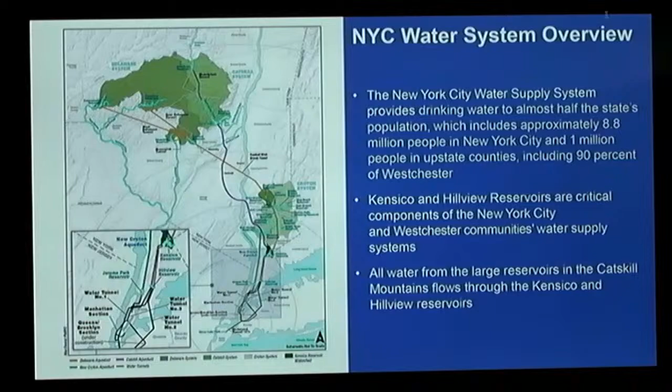So anyway, with me for team introductions, Matthew Warren, who's sitting, not at the front table, but Matt Warren's our Deputy Director for Water Treatment Operations, which essentially puts him in charge of Kensico. Also, I know he's got his hands in the alum treatment plant a little further north, the UV treatment at Eastview.

I know Carl since he's been here, but obviously before Carl too, and I've been helping support DEP's efforts and be a partner with the town for the past 17 years that I've worked for the DEP in different capacities. So some of you may know me, have seen me, or at other planning board meetings. So I don't have a card here because usually I'm just on my cell phone, but I can give it to you. Just come up to me afterwards. I'll give you my contact information.

So when we talk here, just the difference is, so I run the treatment operations, so for the treatment of the city's supply, and the team that's with me and Kevin's team is the one that's going to be helping oversee the project, but obviously I'm responsible for what goes on up there, and Sal will be the first to tell me that, so I will make sure that we do the right thing there all the time, because we've got a lot going on.

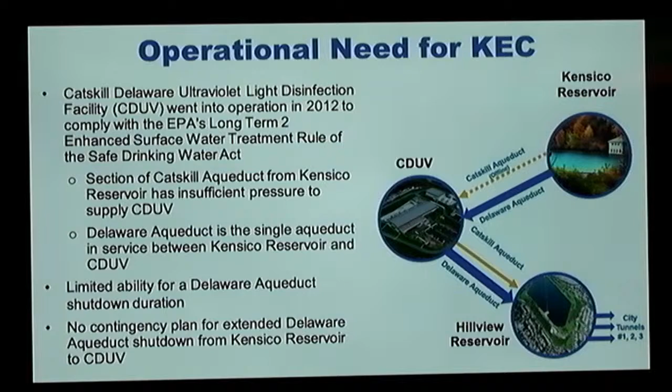So bottom line, we don't have any more than the one tunnel now going from Kensico to the UV treatment plant, and that's always between 90 and 100% of the city's supply in that transportation corridor.

Simultaneous to this project, this is a long-term capital project. It will be about 10 years long from the very start, which has already happened with some tree clearing that started a little bit earlier this year, to the very end, the commissioning of this tunnel, which is scheduled for, I think, 2034.

At the same time, we'll be doing a similar extended project at Hillview. We have new chemical addition facilities we're going to be building down there. All of this work has to be done in preparation for us putting a cover over Hillview Reservoir. We have to cover Hillview.

I think we're still in the design phase, trying to determine what kind of cover it will be. But to operate Hillview while we are building a cover, we will have to empty one of the two basins. It's a little bit trickier operation.

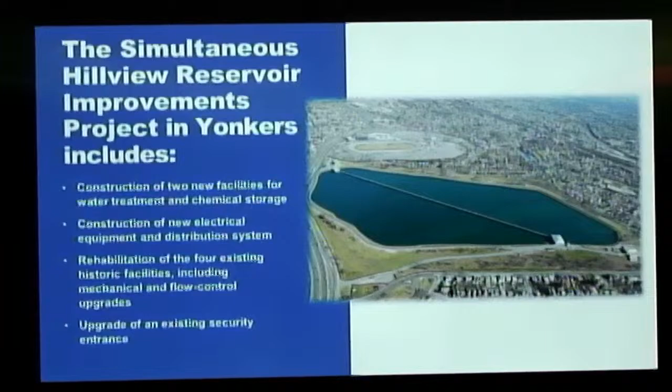Hillview is really one day's supply. If we don't keep a balance coming in with the pressure going out, it can be problematic. The second tunnel and the capacity that it will have, about 2.5 billion gallons a day, will give us that additional pressure and redundancy necessary to make sure that we can do single basin operations during that construction project.

So the cover is supposed to be done by court order by 2048. So welcome to our world of planning. It has a series of predecessor projects that have to get done, and each of them take a fairly extraordinary amount of time, from EIS to the planning, design phases, and the actual work itself.

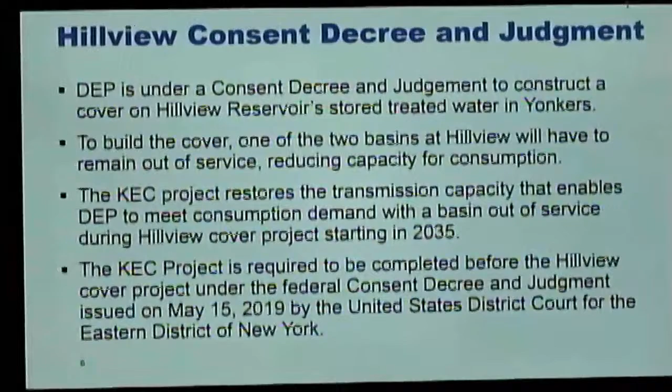So again, we have a consent decree. This was the EPA under their Long-Term Rule 2, requiring us to put a cover on Hillview Reservoir. Essentially, they want, and there's sense to this, that once water's been treated and is ready to be in the faucets, it should be enclosed. It shouldn't be exposed to the elements.

We do a lot of work making sure that waterfowl do not approach Hillview, or we get them away as quickly as possible. Other invasive species we're very cautious of down at Kensico, as well as Hillview. So that's the thinking behind the cover,

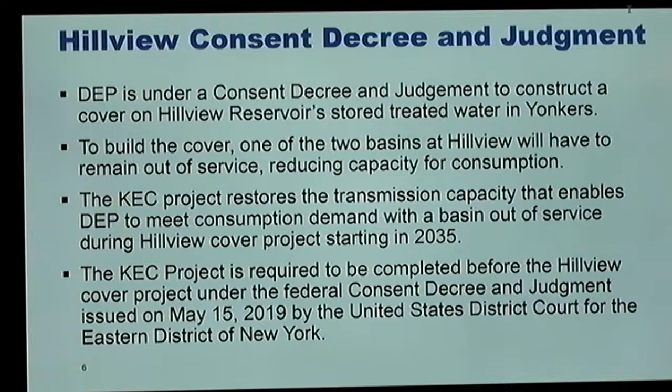So to consider, the UV treatment plant can actually process about 2.6 billion gallons of water per day. With just the Delaware operating between Kensico, we can't even meet the UV treatment plant's abilities. And that's, granted, far more than the city uses now.

The city used to use about 1.6, 1.7 billion gallons a day back in the 80s. Now we're down to 1 to 1.1 a day. I think the other day when it was very hot, we were at 1.3. So some conservation measures have been put in place that have reduced it, but there is still growth, and we are trying to plan for the future.

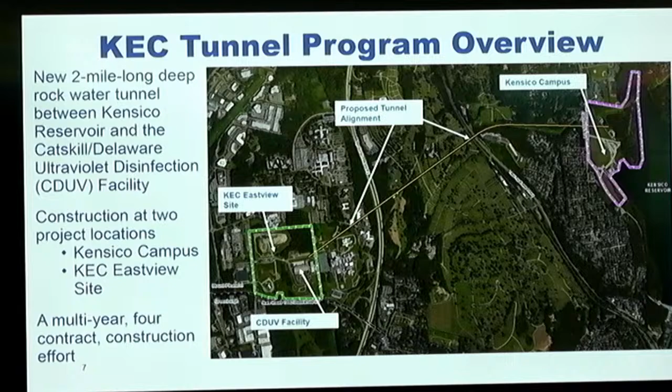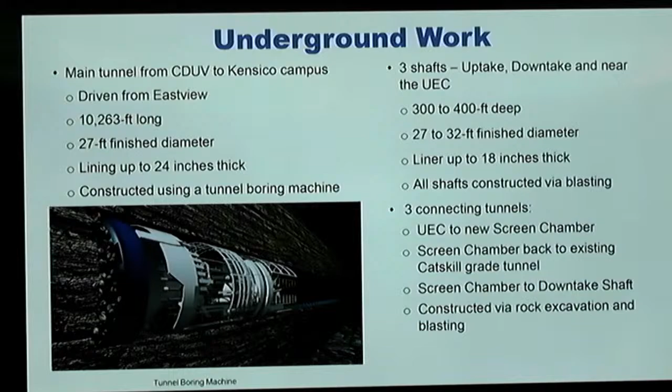So the tunnel we're going to be building, ultimately the finished diameter interior is 27 feet, pretty much wide enough for two freight trains. The lining of the tunnel, the concrete lining, once you bore through it and dig through the rock, we'll have a tunnel boring machine. That's a kind of a cartoon illustration of one.

Tunnel boring machines end up being about 400 feet long. They act kind of like a train. We build a track behind it as it's going through, and then it has various attachments with conveyors to bring the rock that's been ground off. The liner of the tunnel, that will line the inside of the rock hole that we drill, is going to be 24 inches thick. There will be shafts, I think two at one end, one at the other. Each shaft is going to be 300 to 400 feet.

It has to be as wide as the tunnel, obviously, because we have to lower the tunnel boring machine down, and obviously for future access to the tunnel will be necessary at some point.

Interestingly, the Delaware Aqueduct hasn't been emptied or accessed by humans for 75, 80 years. The last time was, I think, 1956. This year we're going to shut it down to do a fairly massive repair project up in Newburgh. We built a new tunnel under the Hudson, the first tunnel since the Lincoln Tunnel was built in the city, and we have to do the final connection this winter and shut off the Delaware Aqueduct for 8 months, which is a phenomenally complicated project that will be simultaneous to the start of this project.

So we have essentially 3 connecting tunnels we'll be building to the connecting buildings at Kensico. We'll have to build shafts, again, at Kensico for the water to go down into the tunnel, shafts for it to come back up, some other connecting apparatus, a new screen chamber at the Kensico campus, and we will detail for each of the phases of the construction what projects are going to be done.

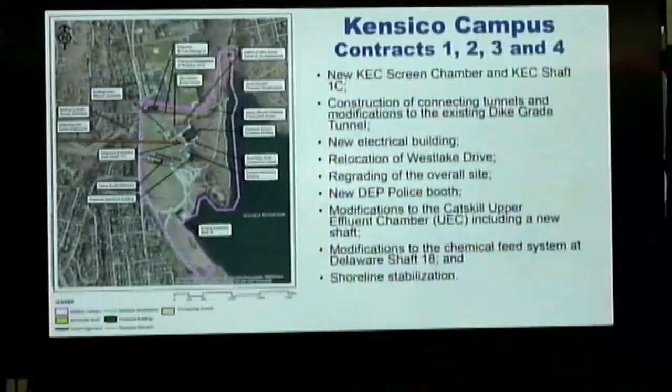Okay, so Kensico campus, again, it confuses me. I know that even the planning board has been trying to wrestle with this, but we broke this project up into 4 separate contracts. So essentially 4 phases, separately designed, but they all fit together. It's one project being done by 4 contractors, each with their own subcontractors.

So again, we're going to have a new screen chamber building, screens. We have these moving screens which keep driftwood and fish from going into the pipes or into the aqueducts. We're not a filtered system. Filter's a whole different story. The screens, though, do keep the big stuff from getting in.

We do have an electrical building that we'll be building here at Kensico. We are relocating Westlake Drive, which is kind of the pothole-filled road right in the middle of the campus right now. I do have good renderings of what this will look like. We'll have a new security entrance right by Columbus Avenue.

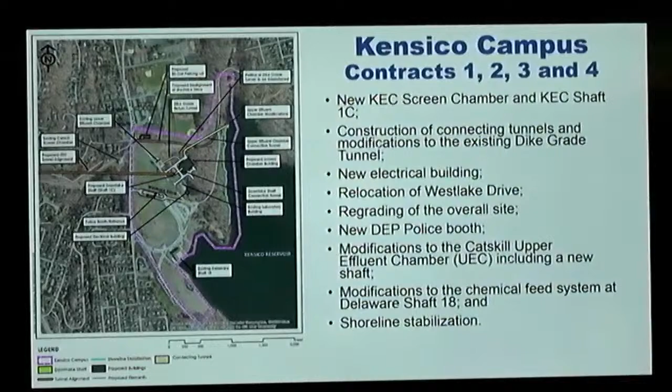And we'll be modifying the Catskill Aqueduct's upper effluent chamber. That's where the water goes from Kensico into the Catskill itself, and creating a new shaft there, and modifying the chemical feed system at the big building that's there right now, the very large building. We call that Shaft 18. That's where most of the chemical addition is done.

Over at Eastview, separately, we do have the building, you can see that kind of block shape there. I think it's going to be about 46 feet tall in total. We're showing the location where it's going to be.

There's really not any residential in this area, so residential impacts during the construction should be fairly minor, but it will be done simultaneously with the work that's going on here at Kensico. That's where the new tunnel aqueduct will be coming up and then connecting into the UV treatment plant.

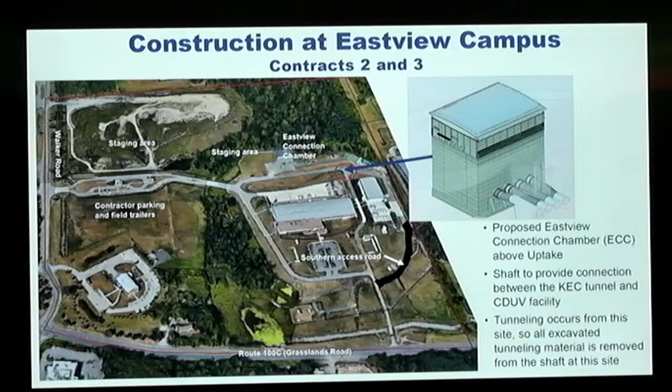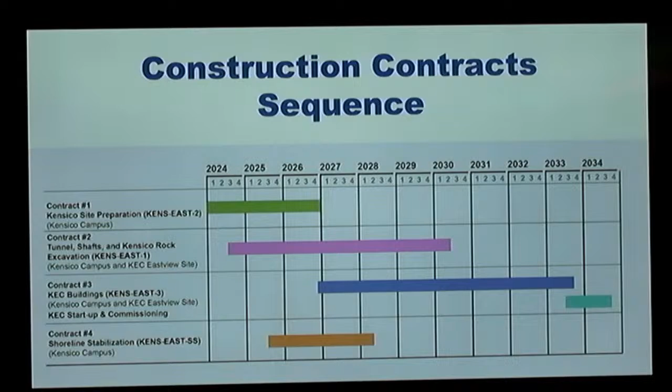So just to kind of visualize this, these colored bars are the different contracts, again, for the one simultaneous project. We're going to go through the scope of each contract separately, and I'll bring this chart back up at the end, just to reiterate that a lot of this is just going to be overlapping each other. It's one project, but I just want you to see the separate elements of the contracts themselves. And I want to bring Kevin up to go through that.

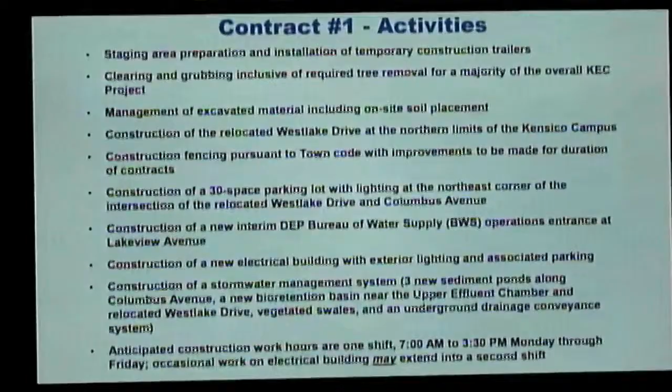The staging area preparation, so that's getting parking and work areas ready for the first contractor, but then also the rest of the contractors. They'll be setting up trailers for us and for their staff as well.

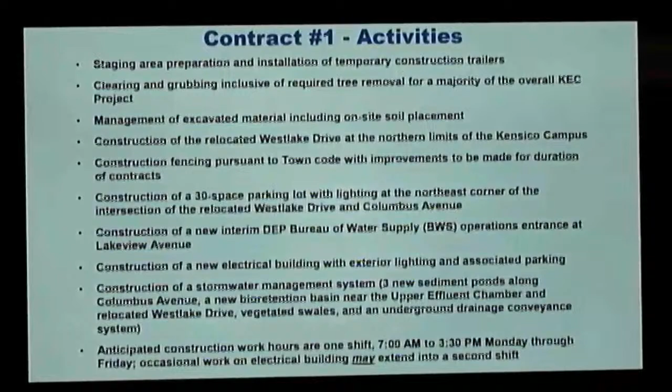And then we're going to be clearing and grubbing, so the tree removal for the majority of the project. Our goal when we went through the planning process was to push it off as late as we can, and to some extent we can do that. One of the later projects I'll talk about, shoreline stabilization, we're not removing any of those trees. But unfortunately, the vast majority of trees that we have to remove for this project, we need to remove right away, so that's one of the activities we'll be doing during this first contract.

But I'll talk about it in one of the later contracts, how we replace those trees.

The next one is management of excavated material. So when we build the road, we're going to be removing soil. We're also going to be removing soil for one of the big buildings there, I'll talk about that a bit later. Our goal is to place all of that soil back on site. We want to minimize or eliminate any trucking of material off-site, so minimize impacts coming off. That's our goal: keep all the soil we're moving on our site.

We're also going to be relocating Westlake Drive from where it is now to the northern part of the property. The goal is that once we've completed that, and once the town has inspected and accepted it, we turn that over to public use, and then we can close the existing Westlake Drive. We're going to do that so we can separate our construction activity from public traffic.

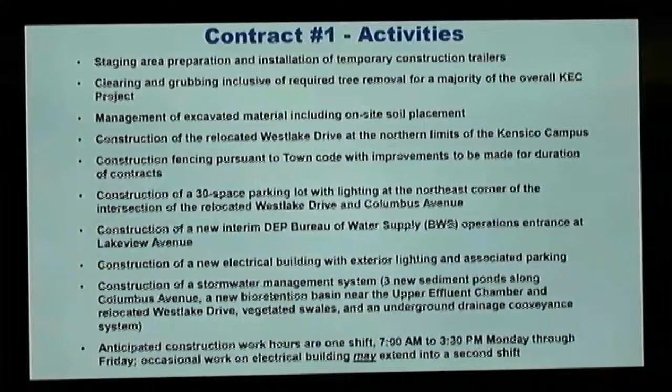We'll also be constructing temporarily an operations entrance for BWS. Presently they use Westlake Drive. We're going to construct an entrance for them near Lakeview Avenue. That would not be for our construction traffic, that would be for operations use, so operations staff and their deliveries.

We're also going to be constructing the electrical building for the site. That'll become our one source for providing power throughout the entire site. And then we'll have some stormwater systems.

For this first contract, our contractor intends to work one shift a day, Monday to Friday, from 7 a.m. to 3:30 p.m. That's his plan. We have to allow for occasions where he might need to work into second shift, but he does not plan to do that at this point.

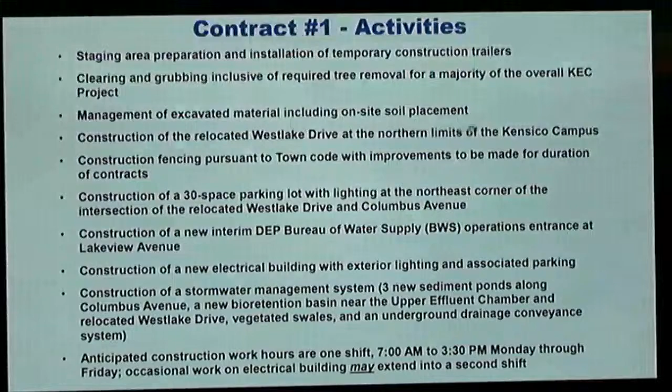So the first thing we'll do is build that road. Thanks, John.

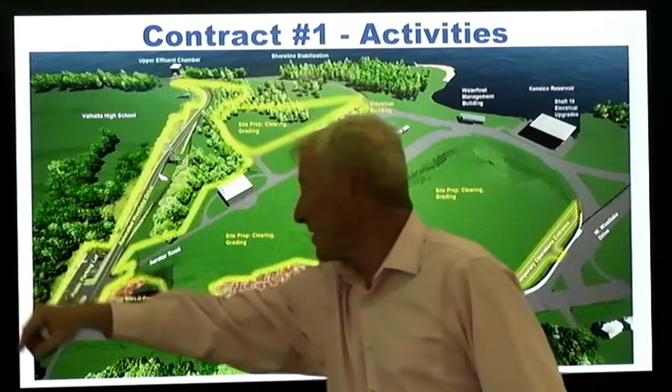Okay, I'll orient. So the bottom of the screen is Columbus Avenue, and the left side is north. If you see the trees on the left, that's the Valhalla High School property. Right here is the high school, the football field I believe right back here, Kensico Elementary, Town Hall. And so now we're facing, the reservoir is in the back, the top of that slide.

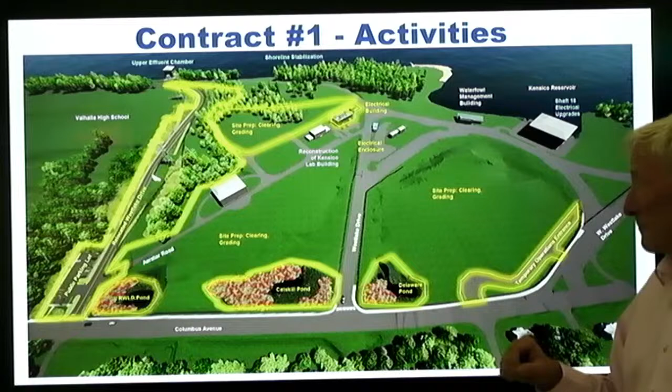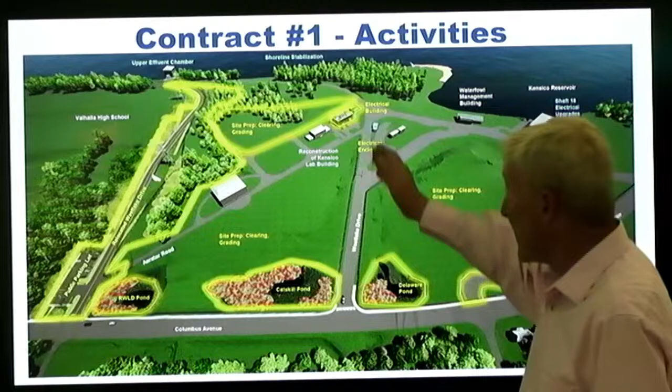So first we will build the relocated Westlake Drive. It's a little hard to see, but it makes its way past the Con Ed transmission lines, so we kind of snake our way past those two towers. This is the current Westlake Drive, a public road, it does have quite a few potholes in it right now, but this is how you access the north end and the communities up in there. It curves around the back along the shoreline. This is going to be the new relocated road here, so taking this public road, which is here now, and moving it to here. This will be the construction of it.

So the 7 p.m. would be the start of construction. The crews coming would be arriving before that.

Did I say 7 p.m.? Yeah, no. I want to be home by 7 p.m. Thanks, Matt. No, I just said no, we're seriously just the one day shift.

So they would be arriving before that, and they're mustering, signing in. So we're hoping to avoid that.

The blasting we'll talk about later. It is a possibility for this first contract. It's not definite, but it is possible. It would not be happening at 7 in the morning. We have to load explosives in, and it takes quite a while. I think John's going to talk about that a little bit. But usually it's later in the morning or very early afternoon when it comes to blasting.

So we have now built the road. We're going to start working on the stormwater structures, that's the RWLD pond and Catskill pond. Then we're going to be grading the site, generally left to right, north to south. If you look up in the top area it says site prep, clearing, grading. We're going to be doing some of the excavation for the screen chamber building, as I mentioned before. You'll see that in a little while, and then we'll be placing it on site in the aerator.

So if you can picture our site now, it's a bit of a depression on either side of Westlake Drive. So we'll be using that to place the excavated material. The goal is not to have this giant mountain, but to have something that looks like the natural surrounding area when we're all said and done.

And then finally, it's a little hard to see, but way up in the back is the electrical building. We're going to be bringing electrical lines underground up Westlake Drive to that building and then distributing it to the buildings on site. And then finally, that curvy road will be our temporary operations entrance, coming to the intersection of Columbus and Lakeview, for Matt's staff and deliveries, not for our construction vehicles.

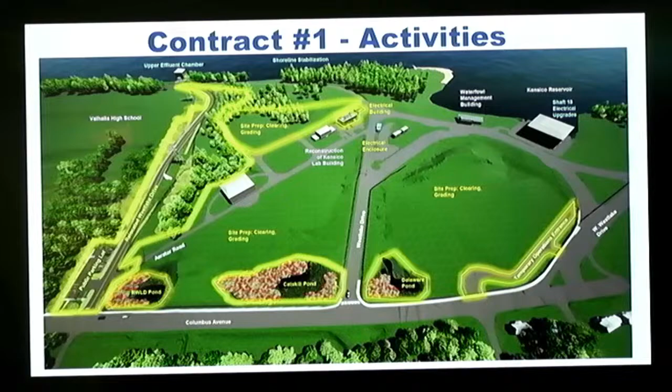When we went through our assessment of our impacts on the community, we took into account some of the proposed development that was planned in the area, including that. So we accounted for that in our future conditions analysis.

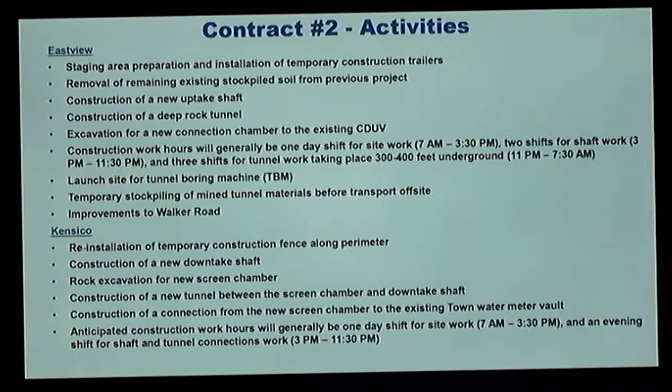From the construction of the UV facility, we had stockpiled soil. We've removed much of it, but there is a small amount that we still have to remove, and that'll be one of the first activities we do.

We'll construct what we call the uptake shaft, but it's the end of the tunnel. We'll construct the tunnel itself, and we're going to be constructing this tunnel from Eastview to Kensico. So that means we're going to be mining it, and all of that material will come out at Eastview, not here at Kensico.

So the work hours for that phase of the work at Eastview, when we're doing site work, again we're talking one shift, Monday to Friday. Once we shift to shaft work, we'll be drilling and blasting.

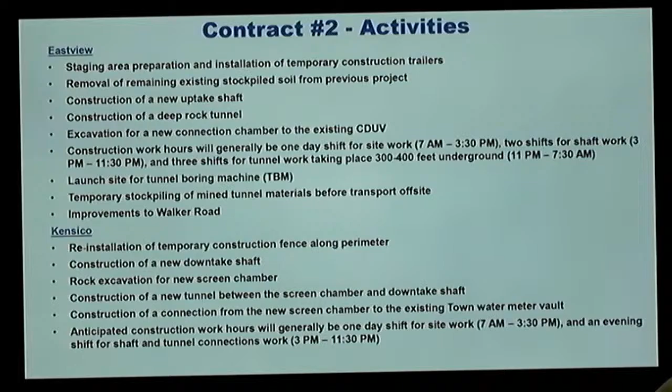At some point when we get deep enough, we'd like to shift to 2 shifts a day, and it's not blasting twice a day. It's a series of drilling into the rock, loading in the explosives. You have your shot, and then you're working on cleaning out all that material. So we do one shift, we do what's called mucking, removing all of the material, and then we would be drilling, and then blasting, and then so on and so forth.

But we follow town code for blasting. There's only certain times of day that we can do that blasting. John is going to get into this.

And then once we get down, over there 400 feet in the ground, over here 300 feet in the ground, then we do a little bit more blasting so we can construct our tunnel boring machine. It's this massive train with a cutter head on the front, and we start mining. And that's a slow process. We just grind our way from there to here, 300 to 400 feet underground.

And we'd like to do that 3 shifts. If we didn't tell you where we are in that line, you would never know. It's very noisy down there, but up when we're topside, you're not going to hear anything. It's so far down in the ground where it's a deep rock tunnel.

We're in rock, so at this level there's no vibration. So we won't hear anything, we won't feel anything, and that goes for the properties that we tunnel underneath, mine underneath.

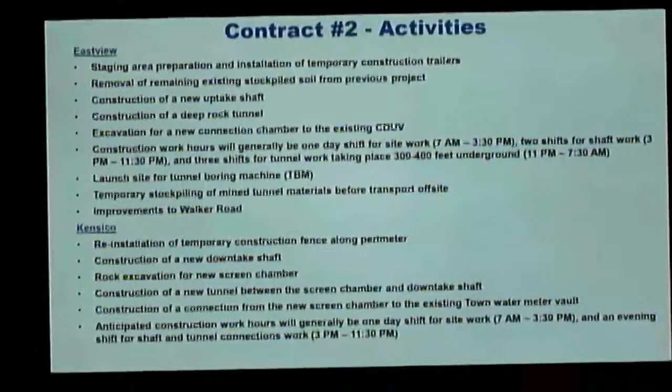And then finally, we'll have improvements to Walker Road. We'll need to create an entrance for our trailers. And then at the beginning of the job, we'll mill and repave the entire road from Grasslands up to Dana Road. After we're all done, we'll do it again. After we've beat up the road, we go and mill and repave it again. And then here at the Kensico site, yeah.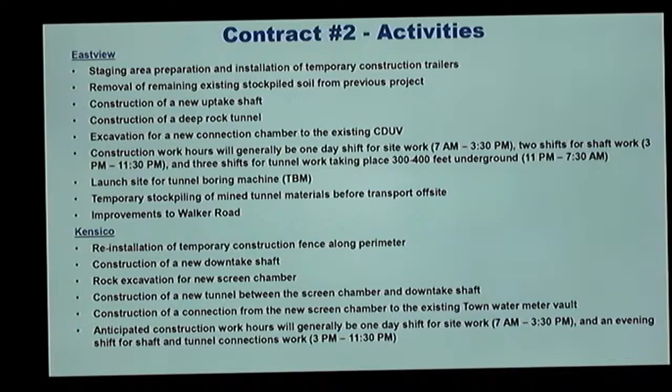So the improvement is just typical road work - just milling it, taking it down a level, repaving it, and then putting in some striping. It's not a major undertaking.

So we're on the, I'm talking about Eastview, which is west of the Sprainbrook, north of Grasslands. Okay, so yeah, about as far - so a mirror image of Bradhurst, that far away to the west.

I didn't hear, could you say that? I didn't hear the question.

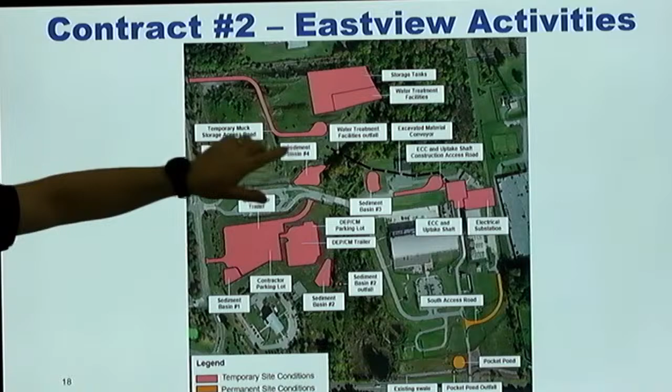Here's the prison, and I think the emergency facilities are here, and Liberty Line is down here-ish. So we'll have our staging area here, and we need a new curb cut here. That soil pile, what was a mountain, is now a molehill, so we'll be removing that. And this is an internal road that we're building.

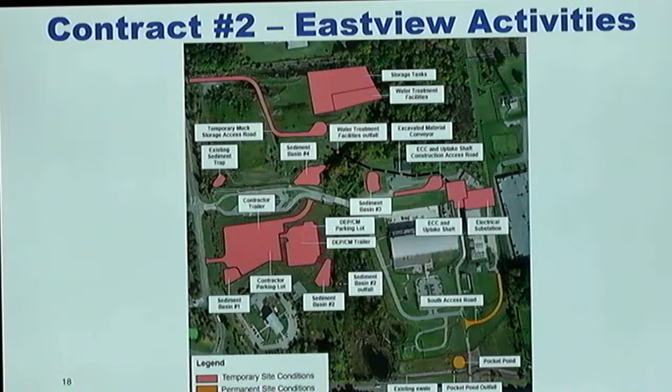We just need that so we can keep operating the UV facility. The shaft will be here. We'll be mucking from here, bringing out all the material from the shaft and the tunnel. Then we convey it, using a conveyor to bring it over here to a small stockpile that gets removed periodically as we go, so we don't end up with that mountain at the end. Any questions on that side?

So we do work with the Gate of Heaven because we are going through there. We've been working with them. Any of the properties that we go under, we work out agreements with them, and we've been doing that for quite a while now. We're in that process, and we would work with Gate of Heaven as well, but no impacts.

It comes up in a bucket. We'll drop it here, and then it gets loaded onto this line. That's actually a conveyor - it'll be enclosed, so minimizes noise and dust. Then it gets dropped off here into a pile, and this is a contractor entrance, so they drive in, load up their trucks, and truck it out, and it's gone. Again, this does not come here to Kensico.

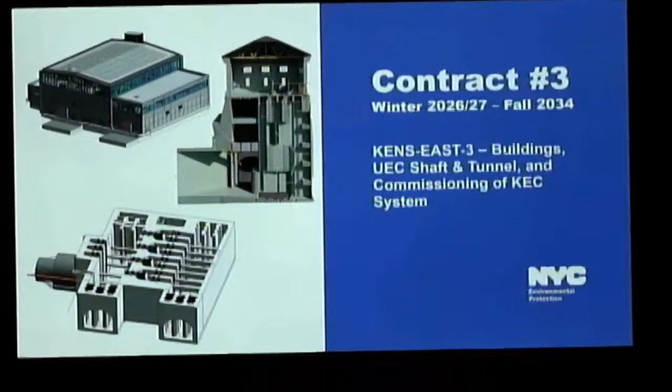So then the third phase of work - these are a few pictures. This is the new screen chamber that we're going to be building here. This is an existing one, we call it the upper effluent chamber, it's just where the water comes in from Kensico. And this is the substructure to the screen chamber, it looks like.

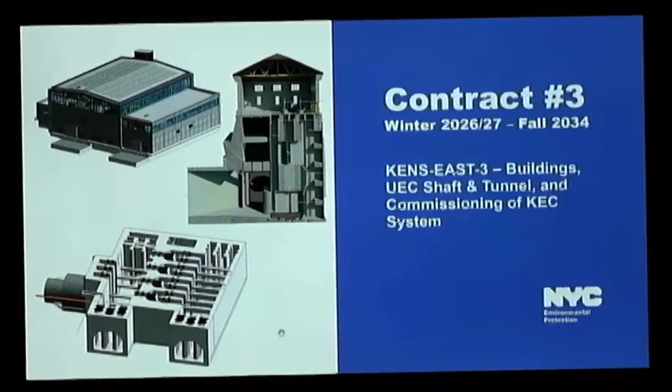So the third phase of the work - we built the two shafts and the tunnel. We're going to be modifying that existing effluent chamber because we need to increase the capacity there. And then that third shaft that John mentioned, it's not as big as the other two - we just need a shaft there, basically because we're increasing the flow capacity.

So there's water coming in. We're going to build a second way of bringing water in through that same building. We don't want to monkey with the substructure there because it's an old building, so we're going to build a second one on top of it. That shaft is just to bring those two sources of water together, so it's not even close to the magnitude of the shafts we've been talking about.

And then it gets brought to this new screen chamber. John went through that in the very beginning. And then it goes down into the downtake shaft. The water will come over to Eastview and then come back up.

We also want to retain the Catskill. This effectively replaces the Catskill, but we want it as a backup. So we'll be making improvements to that intake chamber. We're also going to be building a new short tunnel from the screen chamber to the existing Catskill, and that serves as a backup in some terrible event - if we needed to, we could run water through the Catskill.

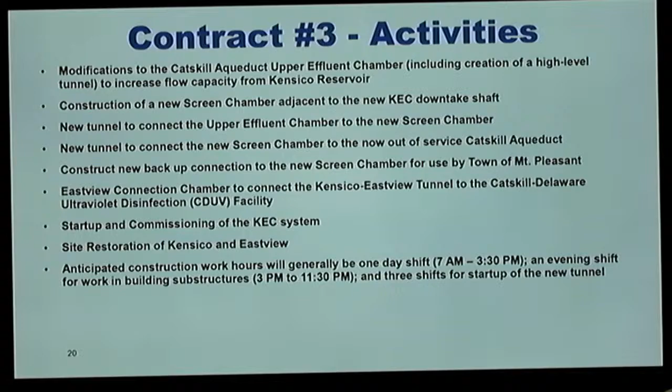I don't think I have a picture of it. The tunnel that we're building comes in right near where the existing one is. So when we reconnect back into that existing Catskill aqueduct, it's really very close to the reservoir. So we're not really doing much with the existing Catskill. Sorry, did that answer your question?

Okay, I'll just jump to that - let me talk about the hours. So for this one, again, site work, we're talking about one shift. If we're working on building substructures, so you won't see it, you won't hear it, we're hoping for 2 shifts.

When we get to start up, we're shutting things down, we have to shut down part of the Eastview facility. Then we're talking about really staffing up 24/7 to get this started, and we're talking 10 years from now. But that's not - for us, that's construction, but it's not what you think of as construction. It's really just getting this thing online.

You wanted to know where they were - so the Catskill kind of runs like this. The new tunnel that we're building will come up here. This is the screen chamber, and the water will come from the intake chamber, the upper effluent chamber, into the screen chamber, and this little bit here is a vent for the shaft. So it'll go down the shaft here, and then it runs across, actually kind of like this way.

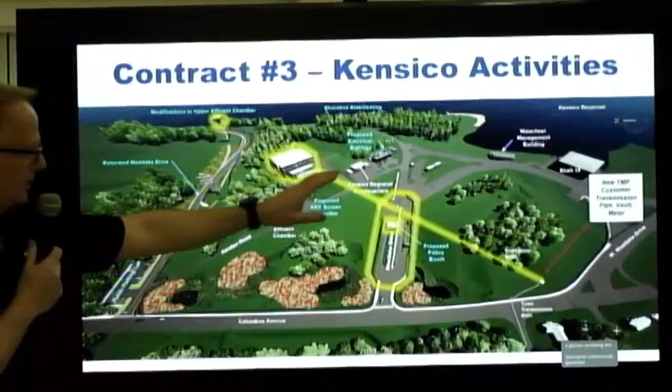They'll start using this again, and that whole thing goes away. And then lastly we have a connection from Shaft 18, the Delaware Aqueduct, to a vault for town water supply. We'll be building a second one connecting the new tunnel to the existing vault.

The kind of area is relatively important to the water department. Right now the town only has one tap, one way to get water. There's no redundant system. Typically, and we've got more than 70 communities up and down our system that are on it, we always require, and it's always good practice, to have a redundant system. If you need to shut down your pipe, you have to clean it, or it has a break, you need another way to get water and keep it going. So this will be the redundant line, a brand new redundant line that we're including in the project for the town water supply.

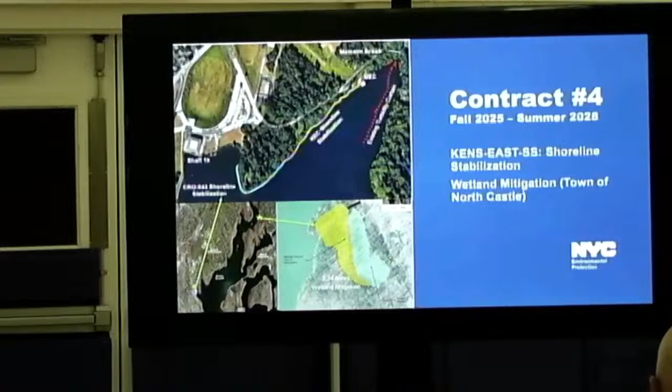Okay, so the last contract, the last phase I'll talk about—this isn't actually the last phase of the work, we actually start this before we finish up everything, because it plays into our turning on of the new system. But it's shoreline stabilization and wetland mitigation.

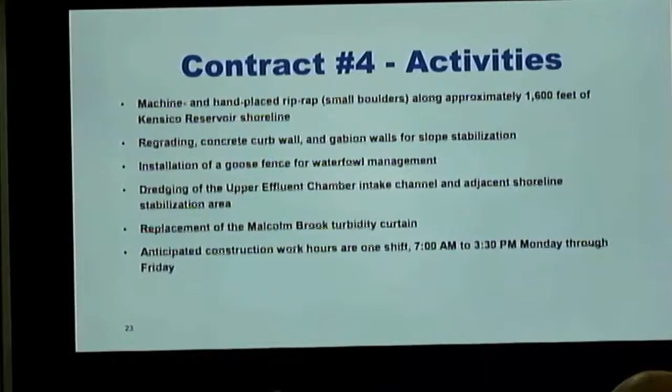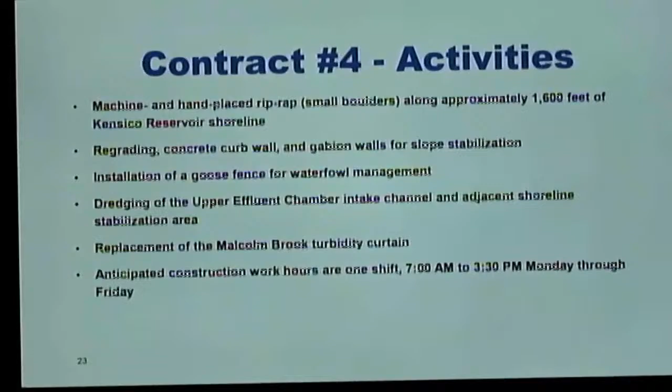The goal of this is to harden the shoreline. We've already done some of this work on the western side of Kensico, on our Kensico site, and we're going to continue that up. So it's installing stone, riprap we call it, to reduce the effect of surface runoff—water quality issues coming into our site. So we're going to be placing that.

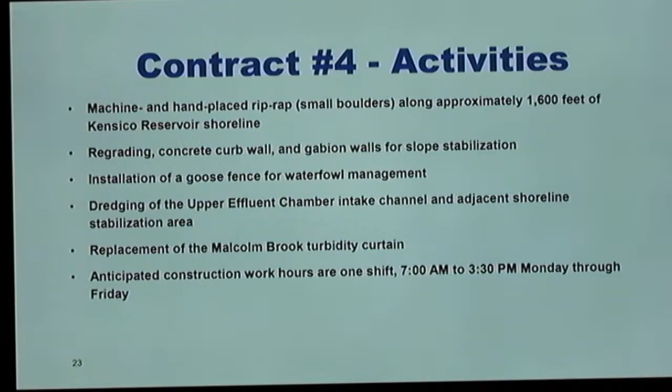We're going to be doing some regrading, goose fencing—you'll see a picture of that—and then also we'll be doing some dredging in front of the intake for that UEC, that intake structure that we're going to be working on.

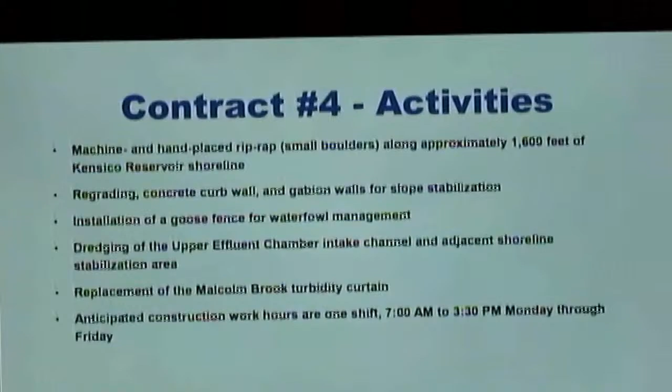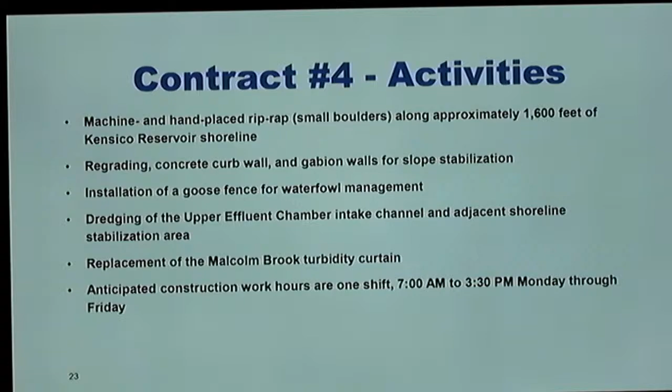And then finally, I don't know if you can see it clearly if you're driving past, but on the other side of the water there, there's a turbidity curtain. It's just laying there, you can see the very top of it. That protects us from Malcolm Brook—any of the suspended solids coming in from Malcolm Brook, we have that curtain in place so we don't suck it into our plant. So we'll be replacing that.

And then we're talking one shift, Monday to Friday.

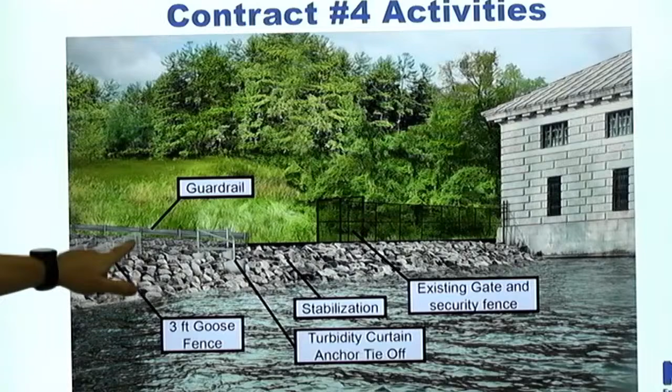So here is a rendering, that building on the right is our intake structure, and then this riprap—so it's really just stonework—and then we have a short fence here, and the goal there is to prevent the geese from using our beachfront to hang about.

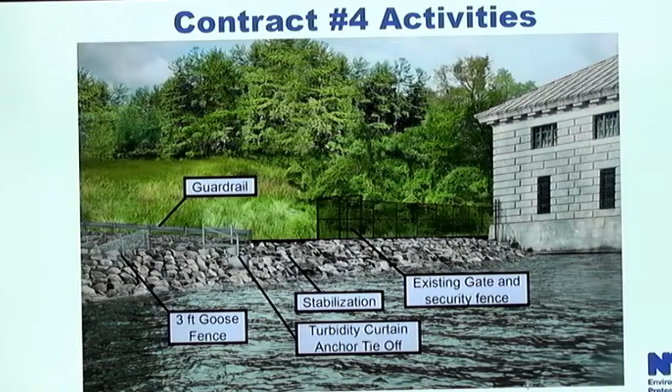I didn't catch it. Maybe I didn't want to catch that. And then some security fencing there. And then, we don't have a slide for it, but by doing this, we're impacting wetlands. So we're mitigating that by improving and creating wetlands within the watershed. Good on that? Yeah.

We have not presented this project to the planning board yet. So we presented the first phase of work at Kensico, and the steep slopes, there were a number of locations within our area, like that depressed area on both sides of our property that have some steep slopes. And clearly, if you can picture near the high school a little bit back, there's some steep slopes there that we have to deal with. So that's what those applications were for.

So I'll orient you. Right now we're on a boat looking at Westlake Drive. So Westlake Drive would be like here. The high school is behind these trees. Sorry, I should have made that clear. So yeah, that's where we're working.

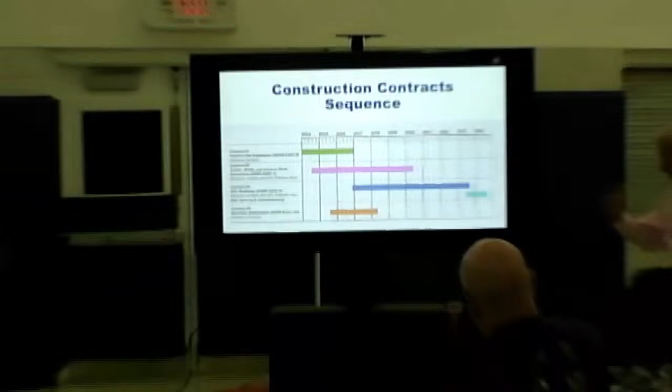Okay, and you, yeah, so let me, I think those are the four. Those are the four phases.

I just wanted to bring this chart back up to again try to tie it together for you, because again the planning board was having trouble with this. I have trouble with it. One project, but different contractors. There will be overlap of the projects getting done both at Eastview. So again, contract 1, 2, 3, and 4, still for the one purpose of building this tunnel.

Let's see, better if I go over here. I think we touched on a lot of this, but let me go through this again.

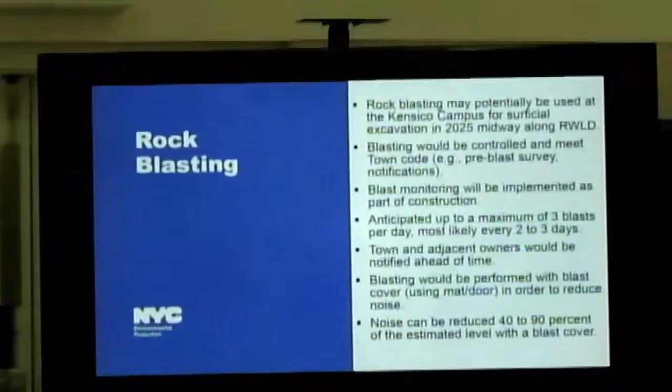I know that the town has recently adopted pretty much the gold standard of codes for blasting, which we will have to follow. So any blasting activities will be pursuant to the town and all the requirements in the code, which includes the pre-blast survey, the notifications that have to be made in the community.

And the sirens that we have to use before and after the blast. Their second siren is usually an all clear. I think we covered the blast cover. The blast cover will reduce a lot of the noise. I've heard sirens for blasts where I haven't actually heard the blast afterwards.

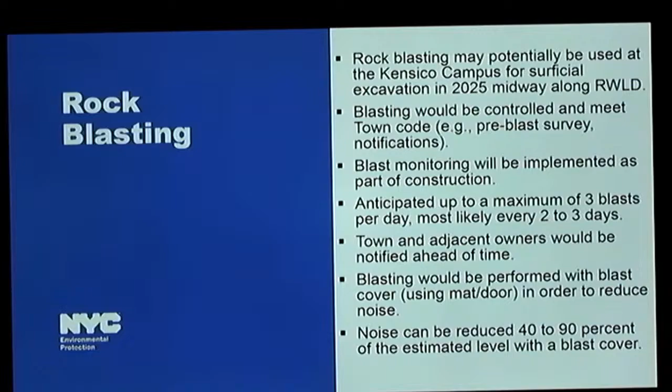You'll hear the three sirens. It really depends on the amount of charge in the blast, how deep it is, and frankly the mats will reduce quite a bit of the noise from the onset at the surface.

Now, anecdotally, when I was growing up, elementary school, middle school, I lived in Manhattan. I was on the 11th floor, and I could look out my window. There was a 30 or 40-story apartment building built right next to me.

I could watch the mats below me from my window. You hear the siren, you see the mat go up, boom, like you just see it rise a little bit like a heartbeat, and then it just falls right back. And the blasts weren't really the loud things. What was much louder were the sirens, and that was at surface. Again, this is a long time ago because I'm quite a bit older now, but it was surprisingly close now that I think of it, considering the conversation we've been having.

Literally probably 200 feet out from my window and then 11 stories down, the blasting was taking place. So this blasting will be much further away, but we will still be controlling a much larger area than was done back in the 1970s at this site in the city.

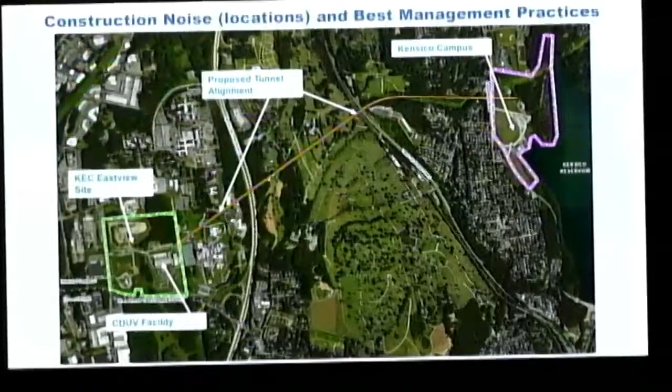So just a little bit about noise. I think this is still the same topic we've been talking about. As I mentioned earlier, we're going to have vibration monitors throughout the construction sites at the perimeters. We're also going to have noise monitors. So if there are any exceedances or abnormal noises that we didn't anticipate, we will be able to address that with the contractors. We will get an alert, we'll know where it came from, and we can address it fairly immediately.

This was, and again, the noise levels and anticipated noise levels of the various contracts and various phases are studied throughout the EIS process, which Phil was in charge of. So some of the noise practices, I did want to just go through these, essentially best management practices of what we're going to do the best we can to minimize noise disturbance. Obviously we have a plan in place.

The equipment that the contractors use, we're going to monitor that. We're going to make sure it's the most modern and properly maintained equipment that they can use. Engine housing doors will not be allowed to stay open. They can't just prop it open and maintain it and keep it running while they're looking at the spark plugs or such. So engine housings will stay closed.

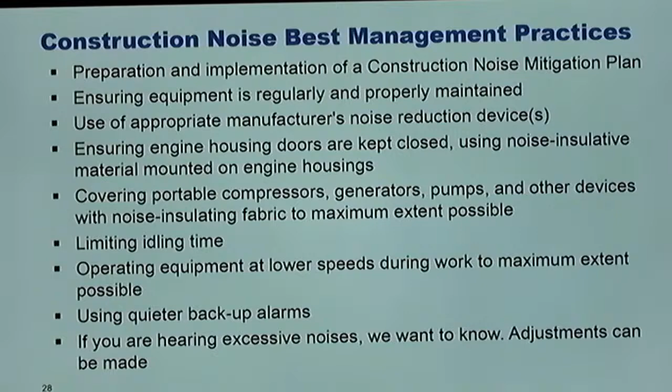Compressors, generators, pumps, they all have to be covered. Noise insulating fabric will have to be used on those, just around the site at various locations.

Idling we will strictly limit. We do this in the city with residents in their cars, and we're going to do it on site. This is our property, we're responsible for it. I don't want to explain to you why we're letting somebody idle here while we go after somebody in the city who's idling their car. So we're not going to allow that with the contractors. Call me, I'll take care of it.

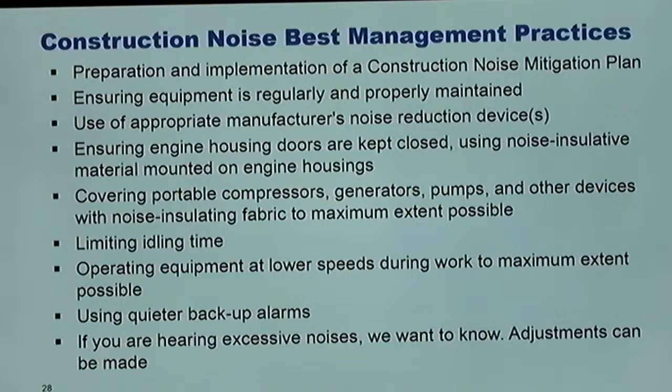Lower speeds, that does help with some of the noise. We're asking our contractors to maintain a low speed at site to reduce noise. The backup alarms, we're going to address some of the noise from those by using less loud backup alarms on the site. Again, if you're hearing any excessive noises that you wouldn't expect, or that you're stunned by, give us a ring, we'll address it. I promise that.

A little background on the process, again that Phil was in charge of, it was a lengthy process. It starts with the town declaring a positive declaration that an EIS has to be done. We came out with this scope of work, everything we would be looking at, from noise levels to wildlife mitigations to forestry to plantings to wetlands to traffic studies.

We did the public information sessions for that. The final EIS was issued last August. It is on file here at the library if that is something you would like to have a look through or a copy of. It's also online on our site, fairly easy to find with Google.

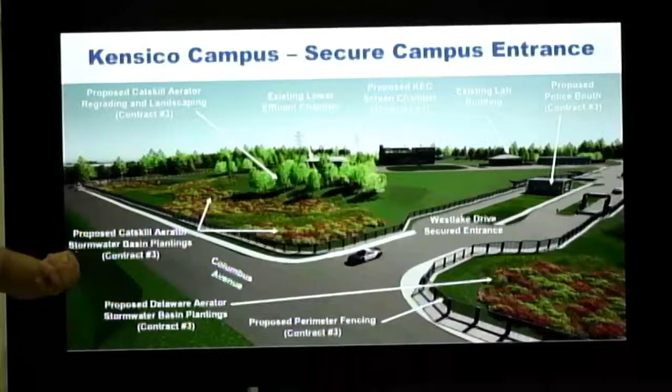Just to touch on your comment about the trailers. So, yes, this is Kensico, we're looking kind of northwesterly. You can see the towers and the reservoirs back here. This is Westlake Drive, Columbus.

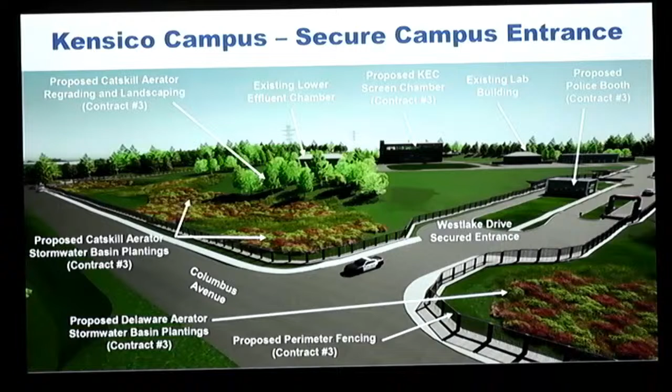Our trailers are going to be in this area here, where all the shrubs and meadow mix and all that is. So when we come to that final restoration, our contracts have 2 years of what we call an establishment period. Dan just touched on that, where we have to make sure everything is viable. And then after that 2 years, we have a 1-year guarantee period. So we have 3 years of growing, making sure this is viable. We've got to get those trailers out of the way before we can start that clock.

Yes, so we have a number of different projects going on. Some of them are short-lived, and the trailers you see up there now are for a contract that just finished, and then another contract that's going to be starting up. So we do have improvements beyond this that are necessary. There will potentially be cycling of trailers, but the ones that we're putting in here, they have to go before.

Right, so those are not part of the projects I'm working on, but I understand they're much shorter-lived than the contracts that I'm working on. So I expect to see them go in my project lifetime.

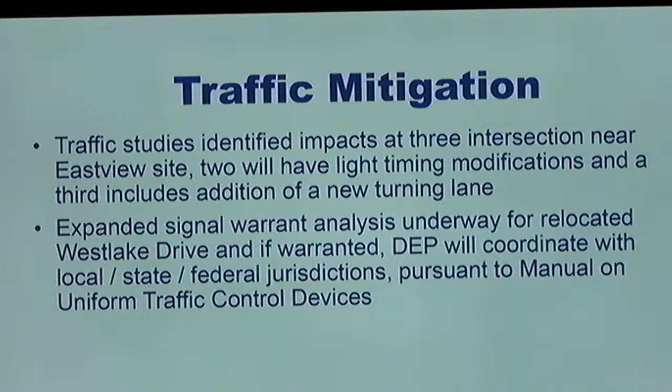So a couple other quick things. I think we've gone through most of this, the EIS and SEQR process. We discussed some of the traffic mitigation. We are doing a further traffic study, and we're starting a warrant analysis of the new relocated Westlake Drive, to determine whether a traffic signal is warranted. Those numbers are going to be turned and analyzed, and we'll continue working with local, state, and federal jurisdictions. It's a county road, so if the numbers justify it, we will absolutely work with the county and town to make sure there's a light. But we need the federal Manual on Uniform Traffic Control Devices to guide that decision-making process.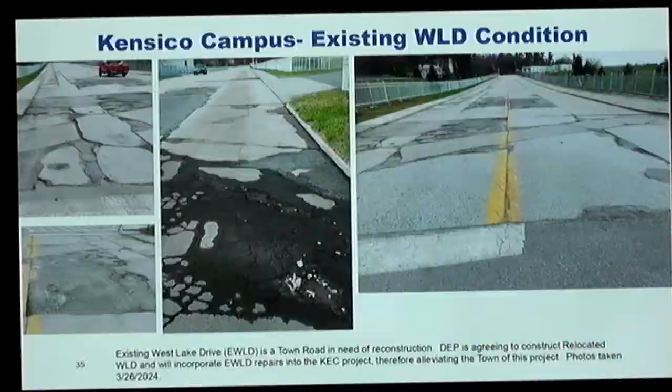If you can just quickly go next. Ultimately, Columbus Avenue here, this car is driving north on Columbus.

This will be the new Westlake Drive. I don't know if you can see it from the back, but you can see the transmission lines further back. That would be the new gate chamber, screen chamber, I'm sorry.

You drive into Westlake Drive, the parking lot entrance for the student lot will be here. Valhalla High School is right here, with the football field in the back, showing some of the new plantings. And this is it in plan form.

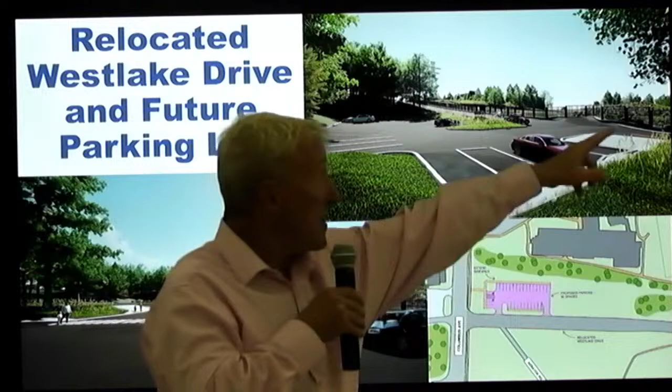Valhalla High School up here, Columbus Avenue, and the new Westlake Drive there. With the relocated Westlake Drive, the perimeter fencing, the new decorative perimeter fencing after the construction fencing will line the entire site again. It will be brand new. A lot of the fencing that's there now, the wrought iron, some of it's getting rusted, starting to look worn. It hasn't been kept up as much as I would like. That will all be brand new at the end of the project.

So that's the parking lot that the students are going to have. The school is getting an easement, and they will be responsible for the lot once it's turned over to them. The sidewalk will connect around to the entrance of the school right next door.

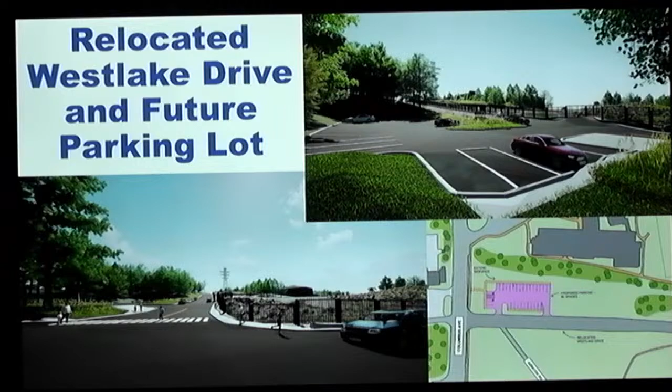You can go to the next one. I think we showed this a little while ago. The current Westlake Drive - this will be the police guard booth entry.

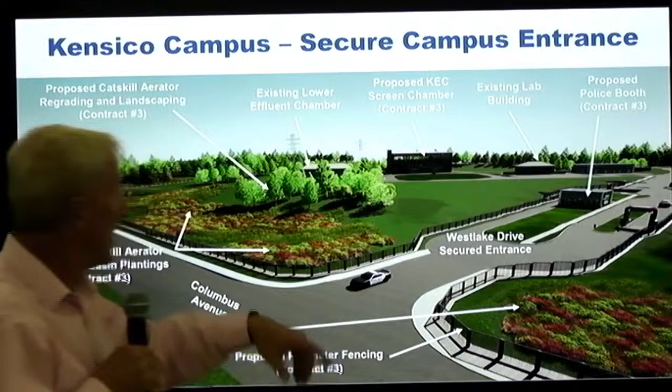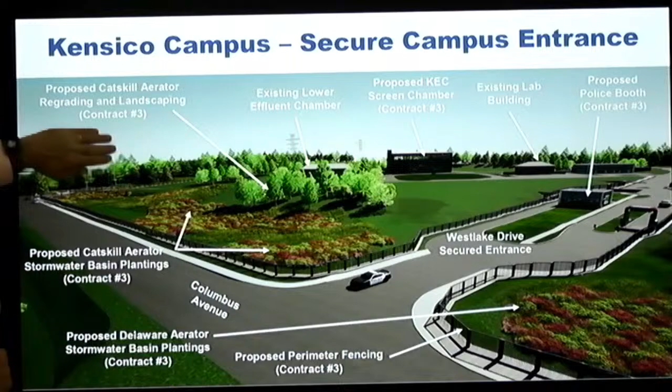That's the proposed screen chamber, so this will be built. That is a rather large building. The existing lab, I think that's the electric building, I'm not positive. The existing effluent chamber, not as big as the current shaft 18, which is over here. Again, Valhalla High School here. The Kensico is in the background.

I think next one. Just a couple of things. One thing I find - our watershed is 2,000 square miles.

We have infrastructure throughout it. It's the size of the state of Delaware. Dozens of towns, cities, villages that we work with, communities, different congressional districts throughout, east side, west side, some rural, some very conservative, some very progressive - everything you can imagine.

Often I keep hearing, DEP, everything you do, you buy some land, you take it off the tax rolls. I want to be clear, Mount Pleasant - we pay 100% of the assessed value on all of our property. All of the infrastructure that we build, that's not the actual conveyance tunnels. So the dam, 100% of assessed value. The reservoir itself, 100% of assessed value.

We're the #1 taxpayer in the town. Mount Pleasant, by far, is the #1 municipality receiving taxes from DEP, $5.5 million a year just for the town. Another $20 million goes to the school districts that are within the town. So 100% of assessed value - we are not tax exempt. Just somehow Delaware County keeps thinking we're exempt.

Next one, quickly. Again, just to reiterate, we're almost at the end, and we absolutely will stick around for questions. A few of the benefits that the town will be getting.

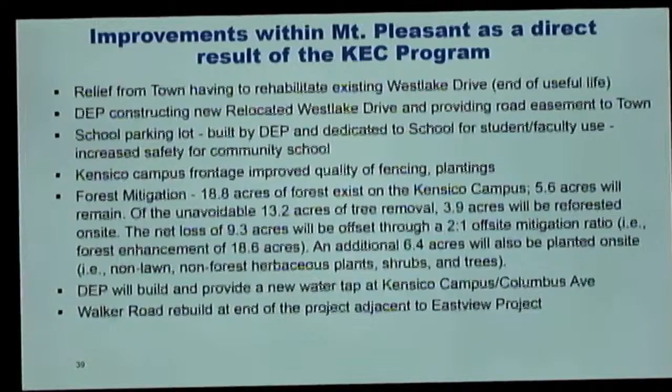Brand new Westlake Drive, which will be turned over to the town, in quite a bit better condition than the current Westlake Drive. School parking lot - the school, I can't tell you how excited they are.

The school board, every single one of them, is thrilled about it. They're happy the students will be parking closer. Right now, on the current Westlake Drive, most of the cars during the day, during the school year, those are all students who park there.

The frontage, once this project is done, will be quite a bit nicer than what it looks like right now, with the aerator areas, the plantings, the new fence line, and the new, more decorative security fence around the outside.

Forest mitigation, which I think Phil already addressed - again, it's a 2-to-1 mitigation ratio. So the net loss of the 9 acres, we then double with the mitigation practices, so 18.6 acres of creating healthy forests, some planting, some culling to make sure that there's diversity within the forest.

Forests are extremely important for water quality. They do a tremendous amount of work filtering the rain and runoff coming into the reservoirs. Some of our reservoirs have a 200 to 300 square mile basin - it's called the watershed, kind of the bowl of water runoff from the hills around it that flows into them. Having a healthy forest is critical to our mission of providing the best quality water possible to half the state's population.

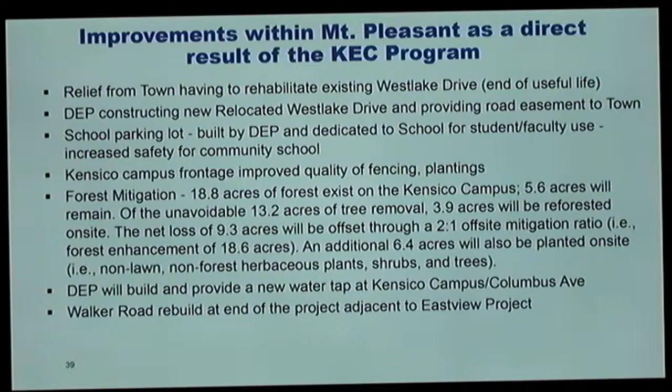We are providing a new tap, so the town will now have 2 taps, redundancy critical for the town's supply. And we are going to rebuild Walker Road after the heavy trucks use it, because Walker Road's in a little rough shape, and that's over on the Eastview side. So I think that is it.